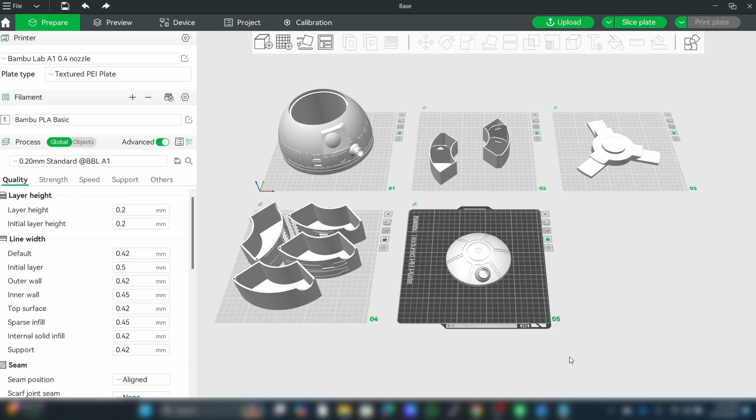Once you're in there, there were instructions to find out where you can get connectors and such. And when I actually opened up all the different STL files, I did in fact notice that there were no connectors. So I went to the notes file and then in turn to the website, and I found this 404 error, and I was like, oh man.

So that brought me to searching online, and there are dozens and dozens of these spool holders, because there are so many different types of spools out there, and those slight differences change dramatically how things are going to fit together, because you don't want it to wobble. You want to have everything stick together. In the end, I found a basic idea after jumping around to all these individuals and watching videos. And by the way, Teaching Tech was very helpful in understanding part of the assembly process.

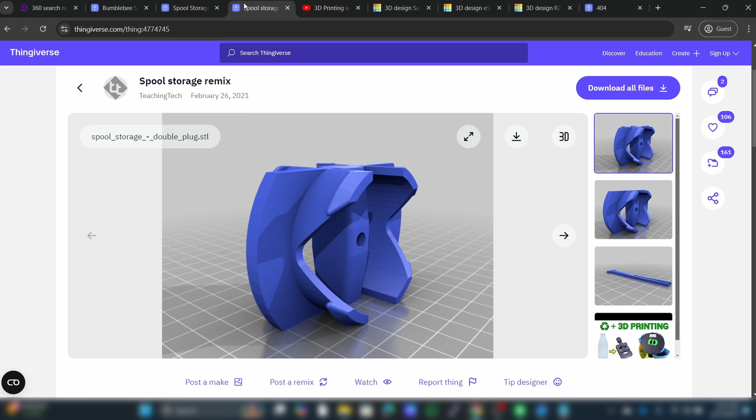But just like him, the modifications that he made were just not available for the spools that I had. I've been using things like eSun, their hard plastic spools, as well as Sunlu 2.0. This is their new spools that came out. I'm going to also be making solutions for Prusa and Polymaker and many other popular ones as well.

But in any case, going through this process, I found that there just wasn't really anything out there that would work out of the box for me. And so I said, all right, I think I'm going to have to start from scratch. And that's exactly what I ended up doing.

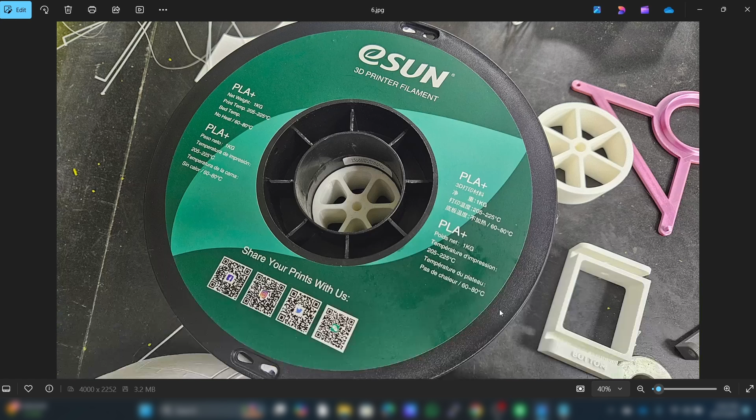And so I started making certain changes to these files to make them work for the spools that I currently have. But there are some basic principles that stay the same. For example, you'll notice that on your drawers there is a hole, and that goes all the way from top to bottom. Those are usually M3 rods, and there are 4 of them. And those secure the drawers in, and that way they can swing open and shut.

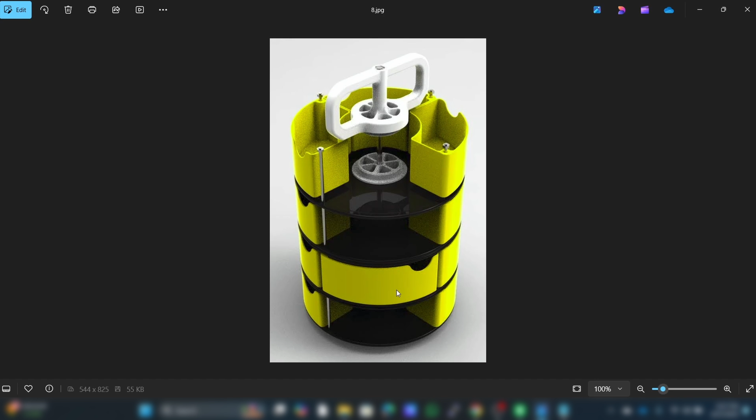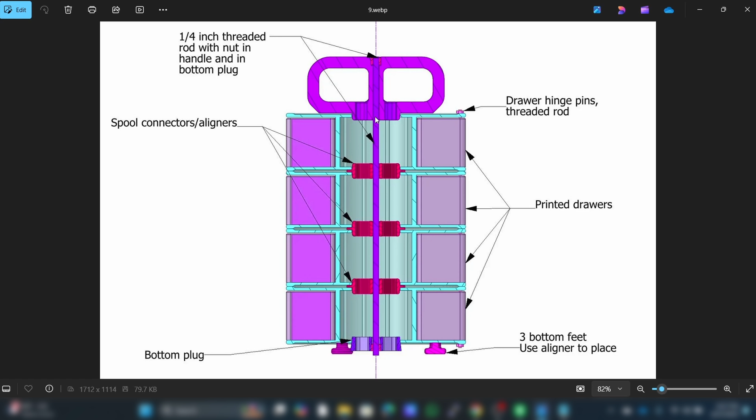There's also a rod that goes down the center. I'm going to be using an M6 rod along with M6 nuts. And so the principle is essentially that the rod goes straight down, and then you cap it off over here, and then straight down over here, cap it off here and over here. And then the dome is supposed to go over it over here, and then through the dome, I actually made an M6 modification to the dome in the files that I started adapting.

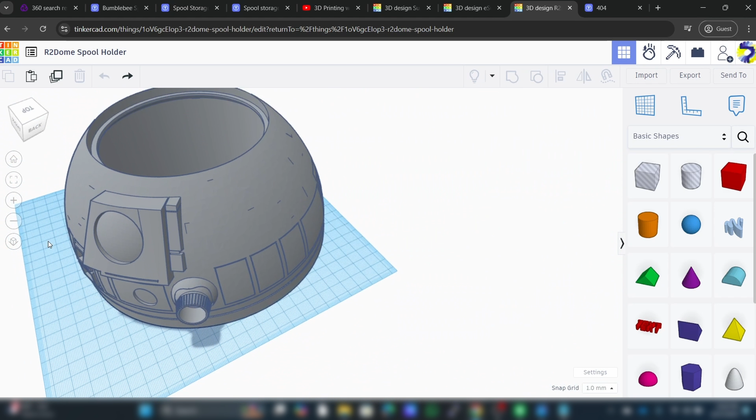So as you can see over here, I put in an M6 cutout over here, which will secure the dome to the different levels that you decide to use. You know, for example, here you could go with 3 levels, but you could also just go with 1 level if you want and a dome. It's up to you.

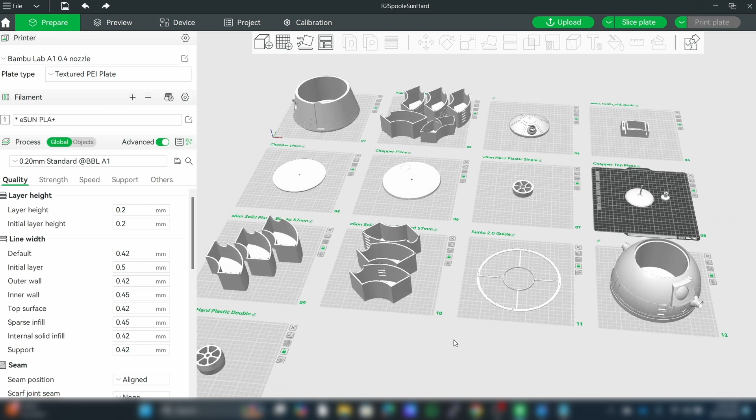But here, the purpose was to show you how I got the files, and then more importantly, how do you assemble it and get it going. So anyway, one of the great things about a lot of these spool drawers that were developed is they don't require any supports, which is really cool. And then Mr. Badley's domes also don't require any supports, which is also fantastic.

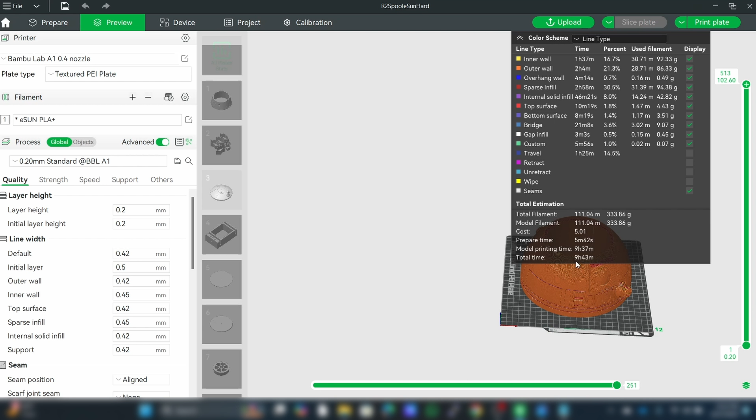So now let's get ready for printing. The big one obviously is the dome. That's going to take the longest. And so if you slice it, you'll see that it will take a total of 9 hours and 43 minutes. So that's quite a long time, but you know what? It's not bad. You just leave it overnight. And it will take a third of a spool basically to print that out.

Then of course you could go ahead over here and print out the solid plastic pieces over there. And I like to do 3 at a time. And this is about 5 hours and 8 minutes. And this is not even a fifth of a spool, which is great.

Okay, now that you've 3D printed all your parts, let's go over everything you're going to need for this project. First, most importantly, you're going to need your spools. And since we're going to build a 3-layered drawer system, we're going to need 3 spools. Of course, you can do this project with just 2 layers or 1 layer, and then you would need fewer parts. But for this video, we're going to do a 3-layered system. So everything you see here is what we're going to need to achieve this.

The next thing, let's talk about all the parts that, no matter what type of spool you get, you need to print for a 3-layered system. You're going to need your dome. You're going to need a dome cover, which goes on just like that. You're going to need 3 detailed parts and 9 blank drawers, okay? So 9 blank drawers, 3 detailed.

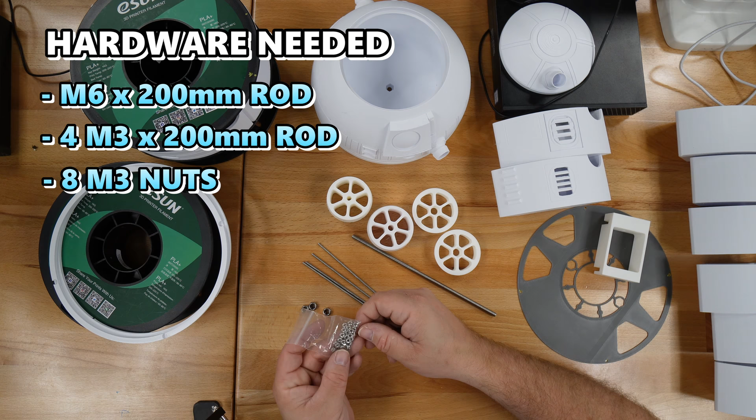So now that we're done with the unique connector pieces and guide, as well as the 3D printed parts, let's talk about the hardware. In the middle of the spool, you're going to have an M6 rod, and this is an M6 by 200 millimeter rod. And it's going to go right up the center and end up basically inside there. And now you're going to also need 4 M3 by 200 millimeter rods, as you can see here, along with M3 nuts. So you're going to probably need about 8 M3 nuts.

So now let's talk about the tools. What tools are you going to need? You're going to need a mallet, whether it's something like this or something a little bit lighter like this. That is fine. Please don't use a hammer. You're going to break your parts, okay? And then you're going to also maybe get bolt cutters. And again, this is all about the aesthetics. So that is everything that you're going to need now to get started on this project.

So let's begin. All right, so let's start working on drilling the holes, top and bottom, on our spools. So we're going to set the guide. And on this type of spool, if I'm putting in a drill like this, I don't want the holes to end up over here, because then it's not great. So I'm actually trying to avoid where these holes are. It's not the end of the world if they are, but it'll just make it a lot easier that I know that I'm drilling through solid plastic.

And you can see I had already marked it. So once you do, you just mark it here, mark it here. I took an acrylic marker. Sometimes people use pencil. It doesn't always come out so clearly. But you can just mark it in any way that you can. And once you've marked all the sides, you'll be able to use this tool over here.

And essentially, you're going to take your tool, like so, and line it up just like that. And you're going to be able to see exactly where the yellow is. And then you're going to just flip it over and mark the other side. Actually, you're going to probably do the thicker one on the top and then the thinner one will be on the bottom so that your pencil can get through. And you're going to just mark it. And that way, your hole is going to be aligned top to bottom.

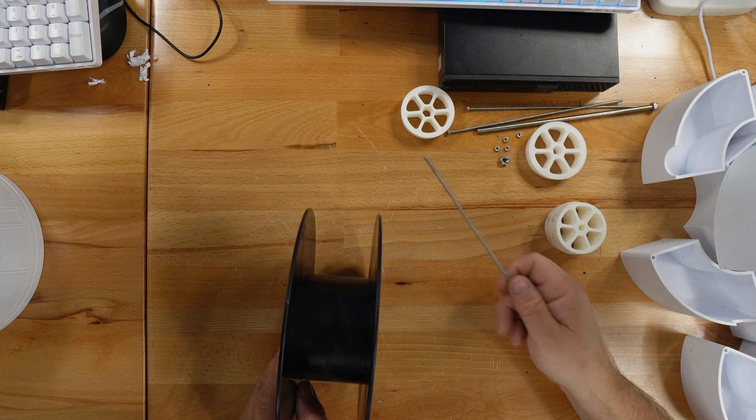You really just need to do it one time. Because once you do that and you've marked your top, you can now line that guide up again. All right, so now at this point, what we can actually start doing is start loading in our M3 by 200 millimeter rods, and we can start working those into our spool and start building upwards. Since I'm starting at the bottom, I would like to put this detailed piece on the bottom. So I'm gonna put it in something like that, okay?

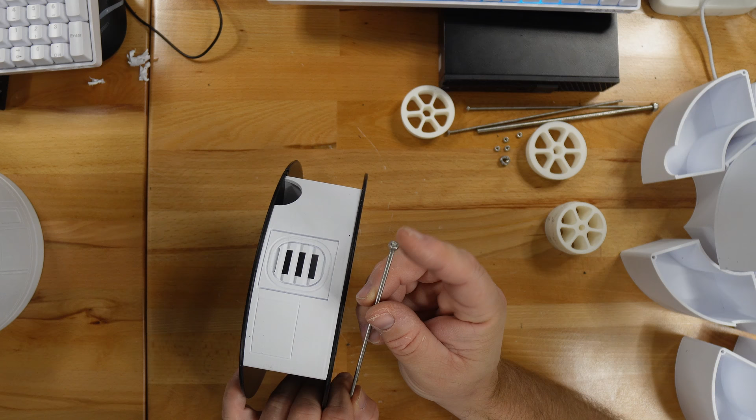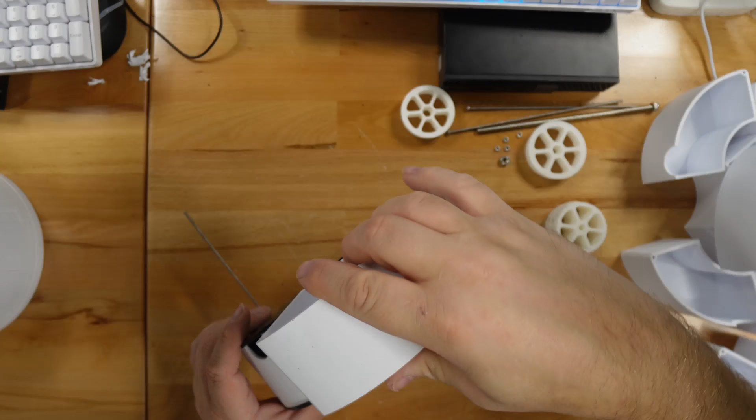And now I'm gonna take the M3 rod, and I actually like to put the M3 nut right at the bottom already and get it prepared so that it just will stop when I put it in. And so that's how I'm gonna go about doing it. So let's start from the bottom and go upwards. So here we go. So that's one, okay? And now we're gonna do the second one, which is another blank one. So let's do the blanks. Okay, got another rod. And we're gonna just keep working our way up.

Okay, that's two. Here's the third one. Get your rod in there. And I know you would say, all right, let's line them all up and then do it in one shot. Well, that's never going to work. I mean, maybe, but very unlikely. Most likely, you're going to have to wiggle things around because you might be off even by a smidgen, like a fraction of a millimeter. So keep that in mind, that it's just really unrealistic to just put down the rods in one shot and not think that you're going to have to wiggle it.

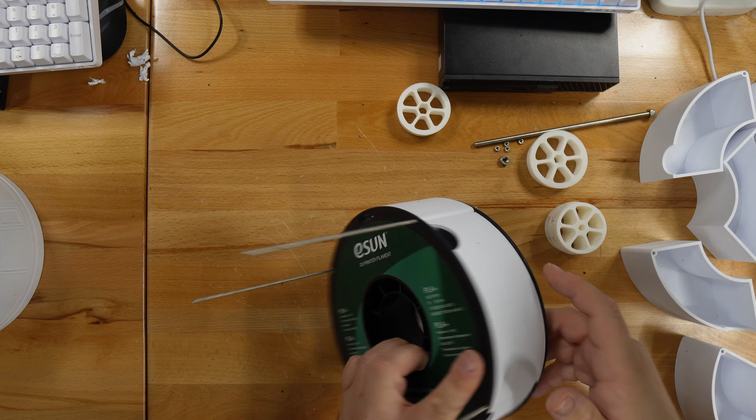So I'm finding it just a little easier to start from the bottom and work our way up. Okay, and then this way, if we run into any problems, we can handle it one piece at a time, all right? So there we go. We've now done the bottom piece, and the pieces are all in. Now we're gonna move on to the second layer. So what we're gonna do is take one of the double connectors here, and we're going to kind of press it in, and you're not trying to even it out. You just wanna give it a little tap so it's in there, because the next spool that we put in, we kind of want the two to bite together so that that piece is gonna have that tight connection with the next spool.

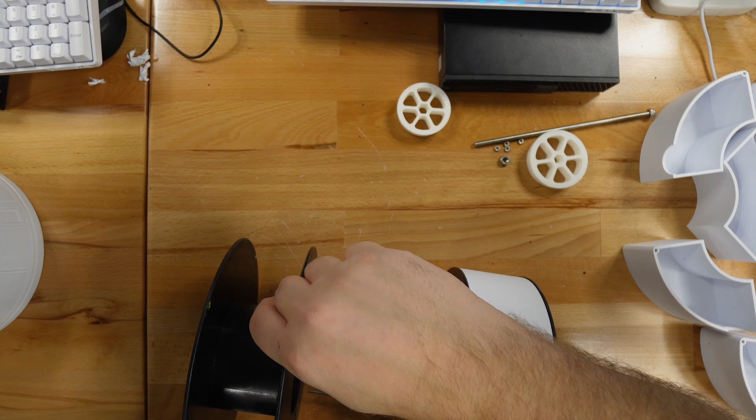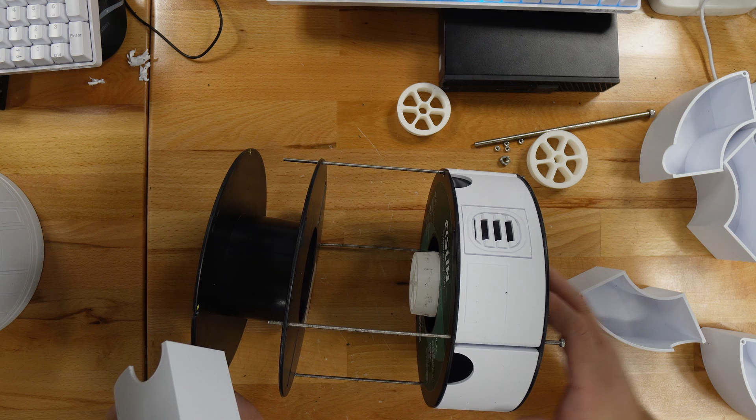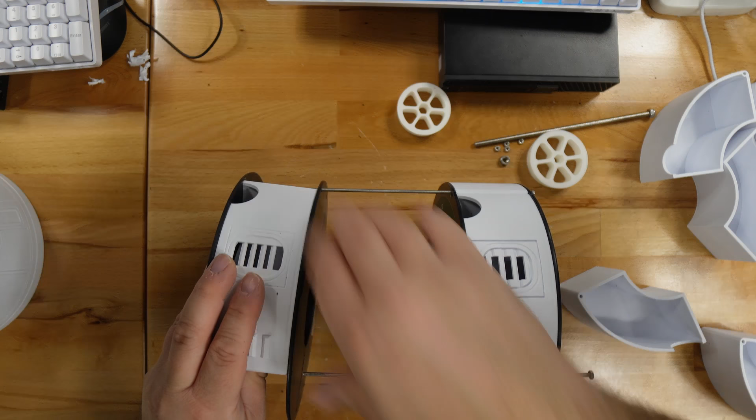So we'll go ahead and lower that down. And actually, before we lower it down, let me do it on a side view, what I'm doing. So I'm gonna start lining up these pieces, right? And then what you wanna do is get your middle detail over here ready to go. Okay, so you can see I'm kind of lining it up this way, but it is easier for me to do this while it's facing upwards for me. But whether you do it sideways or facing you, it's really your choice. All right, so let's go ahead and put that one in. Okay, all right.

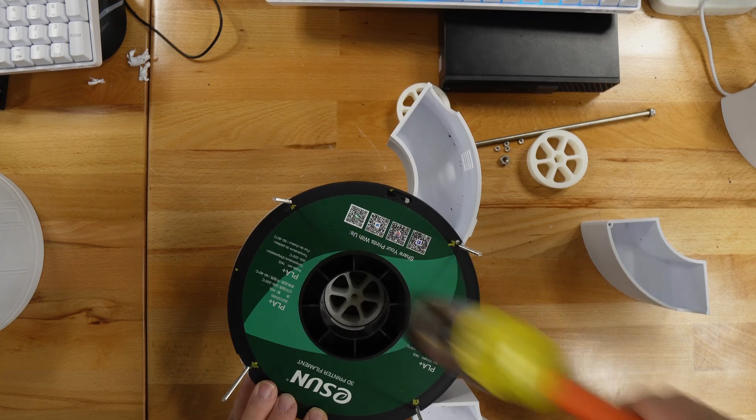Let's get the next one in. Okay, so push that in, get everything in, and now rest it back on the table. And then this is where you might want to give it a little hammer across, because you really want those spools to be nice and flush. And if you don't find that to be the case, then keep going at it. We are now done with the second or middle layer.

All right, now on to the third layer. So we're gonna, once again, take a double connector, put it in on the top. Again, don't hit it in too much. And we're now ready to begin putting in our pieces. So I am just gonna, again, line everything up here. Okay. And on the top piece, I am gonna go with the utility arms, as you can see right over there. So I might wanna load that first one up, get it ready.

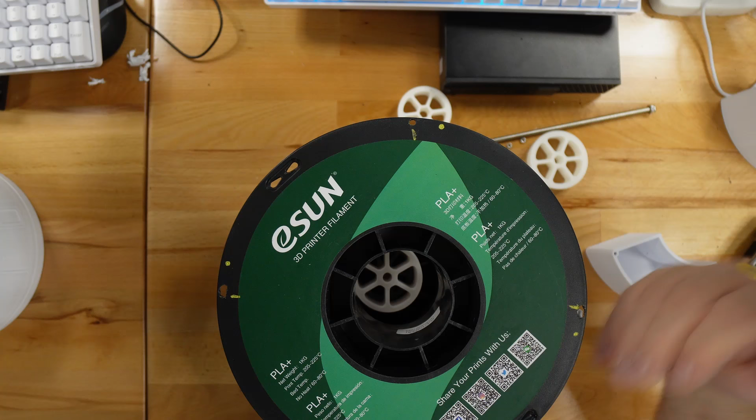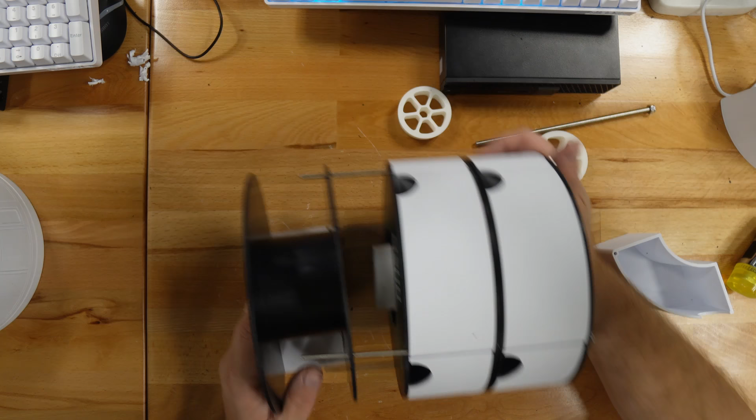And again, sometimes you might find it easier to do it this way, facing you. But because I want you to see what I'm doing, I'm going to face it the inconvenient way so that you can see it. That's okay. I want you guys to learn how to do this. And if I have to suffer so that you can see how to do it, well, then that's okay with me.

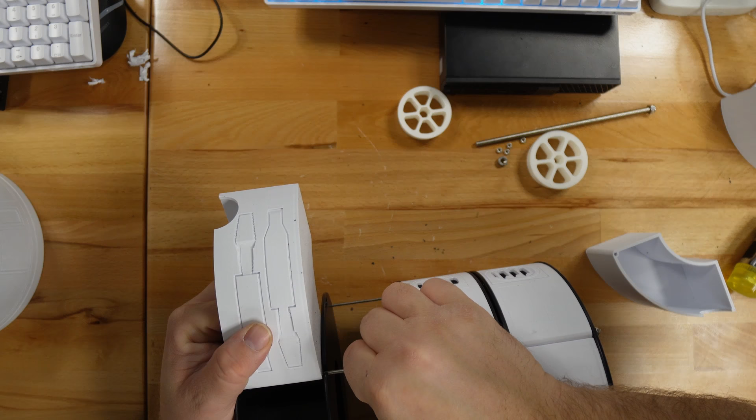That's so annoying when that happens. All right, so what you're gonna want to do is just put that back up, and this is where it gets a little tricky because you kind of want to let that hang there, and now you got to put in that final set. It's possible to just do that one after the other and keep rolling it around. But because it's the top piece already, you might be able to pre-align everything and try to stick everything on in one shot. But again, a lot harder to do that.

In theory it sounds reasonable, but in practice I just don't think that's gonna fly. Okay, but we're almost there anyway, so it doesn't matter.

Okay, there we go. All right, so now that they're all on, that's on, that's on. That one kind of fell off, but we'll get it back on again. Okay, that's it. So now that they're all on, we're gonna push it through. Make sure all your screws on the bottom are pushed through. Push them all in, make sure they're all in. Okay, now here we go. Set it up.

And now just make sure you guide in those holes. You're gonna need those screws to come through to the top. So see, there we go. That's one screw on the top. We need that there, and we need that on each one of these. So make sure - there's the second one. Okay, let's get the third one. Come on.

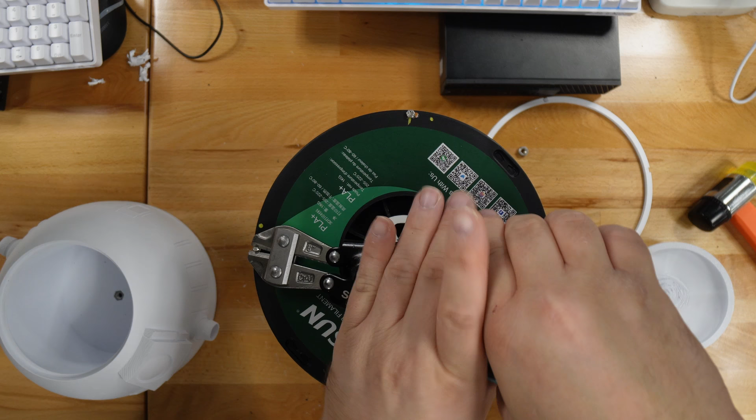So I'm actually going to cut this a little bit shorter, and maybe even this a little bit shorter. I have these small cutters here, and I'm just going to go ahead and again put on your safety glasses. The best thing to do is just put a box, maybe even angle it so that when it shoots off, it goes right into that box.

All right, so this is what I was talking about. There's this little piece here, and you can actually press that down on top of the nuts, and that's going to hide it. It doesn't totally hide it, but it does a pretty good job of hiding it. So you just don't see so much of the screw. You do see a little bit of the silver part here, but that's about it. So I made this just to give it a little bit more of a better cosmetic looking appearance.

Now, the next thing you're going to do, you're going to take your M6 nut and you're going to put it right on the bottom of the dome. It might be a tight fit, so you might just want to try to line it up and press it in and it's going to snap in. And then once that's done, you can actually just start tightening it by spinning your dome around, just like this.

And it will start, the teeth will start eating it up. Now, if your thing is falling down from the bottom, one suggestion is to turn it over, and you can push over here, push in a little bit, and then push the dome back on.